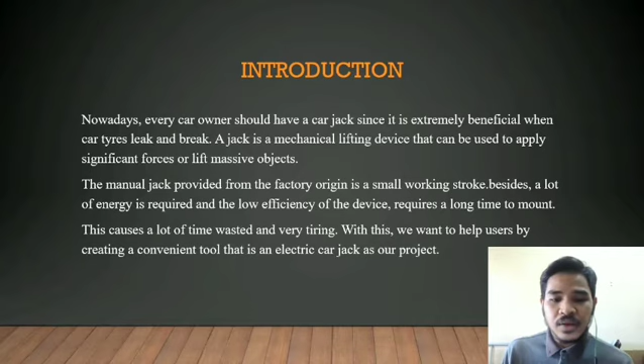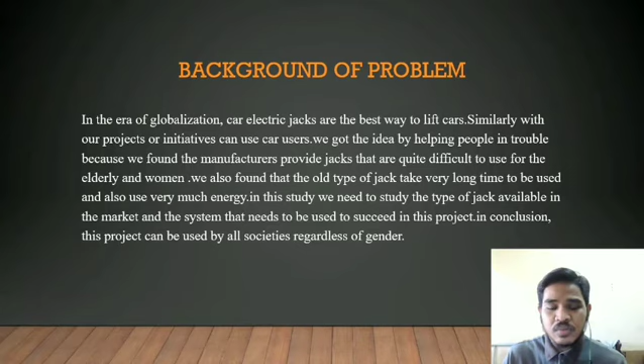Problem statement: first, the normal manual car jack is very tiring to use. Second, the present type jack available right now is hard to be used by women and elderly people. Third, the old type of jack takes very long time to be used and also uses very much energy.

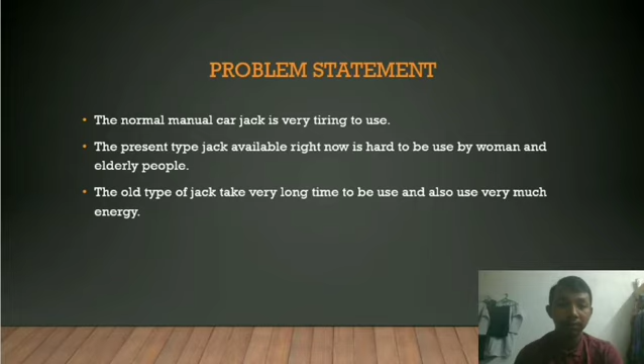Objective: to design an electric machine to make the use of manual car jack easier. Second, to develop a hybrid jack system. Third, to make a jack that can be used by everyone.

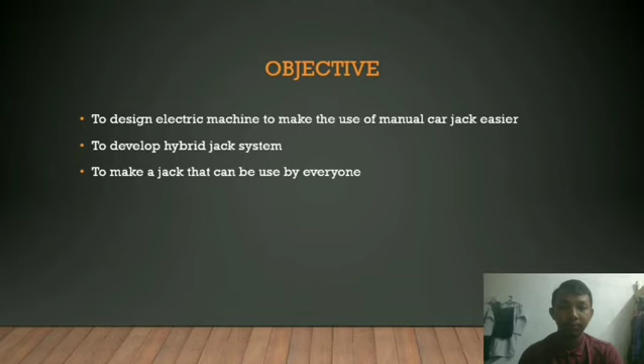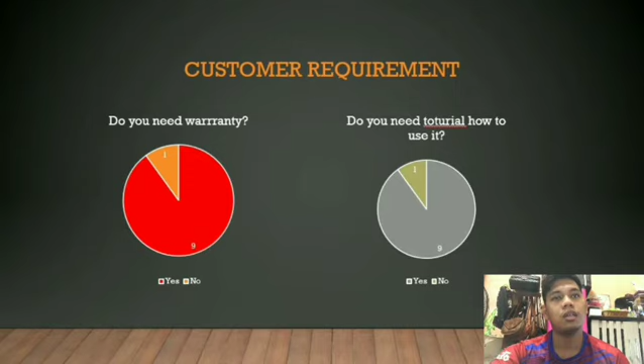And next, do you need warranty and do you need a tutorial on how to use it. Many people need a warranty and a tutorial on how to use the hydraulic jack.

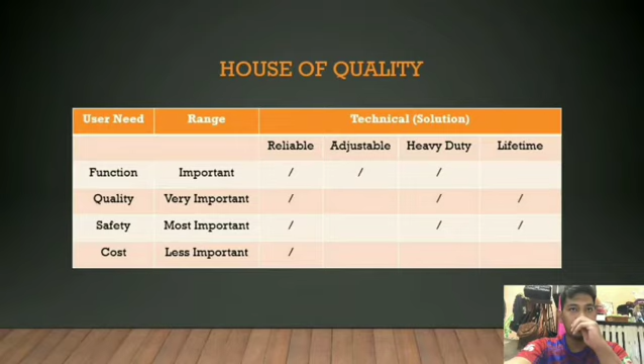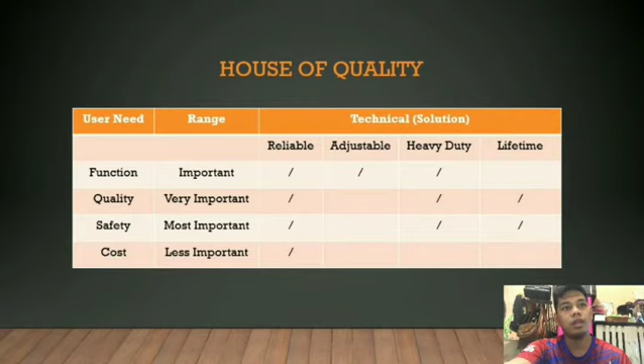Function is reliable and has adjustable, can do adjustable, and can work in heavy duty. Quality is reliable and heavy duty. Safety is reliable, heavy duty and lifetime. Cost is less important and reliable.

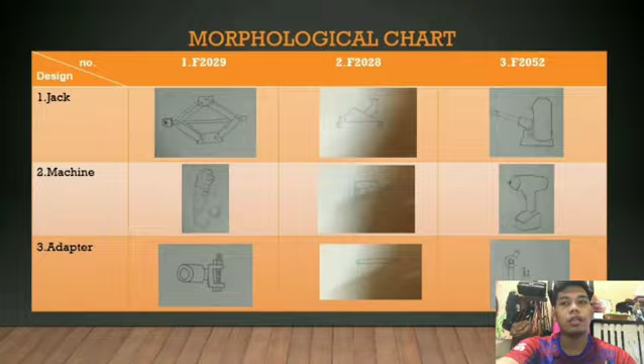On the first picture, it shows the normal type of scissor jack that I would like to use. The middle one is the grinder that has been modified. And the third one is the adapter that fits into the grinder and is assembled into the normal scissor jack.

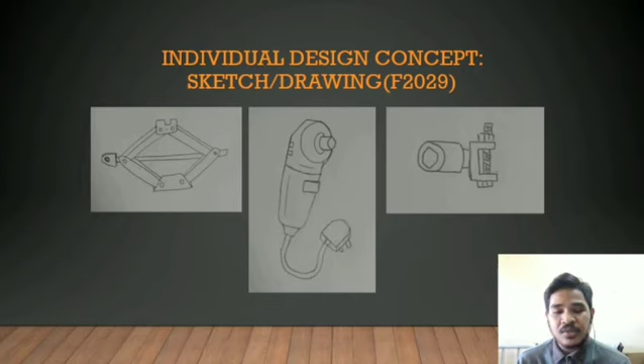Next is individual design concept, product 3. For the portable electric car jack, I use a normal type of scissor jack that supports a maximum of 3 tons.

For the machine, I use a grinder that has been modified, adding a welded hexagon head alloy steel size 17 mm. The bottom is the picture of the bolt. For the adapter, I use a size 17 mm socket that is welded with U-shaped steel.

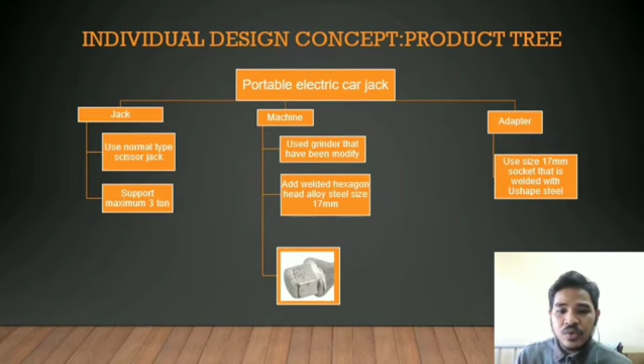For the individual design concept materials, I will use carbon steel. Carbon steel is a steel with carbon content from 0.05 up to 2.1%. According to the American Iron and Steel Institute, no minimum content is specified or required for chromium, cobalt, molybdenum, nickel, niobium, titanium, tungsten, vanadium, zirconium, or any other element added to obtain a desired alloying effect. The specific minimum for copper does not exceed 0.40%, or the maximum content specified for the following elements does not exceed the noted percentage.

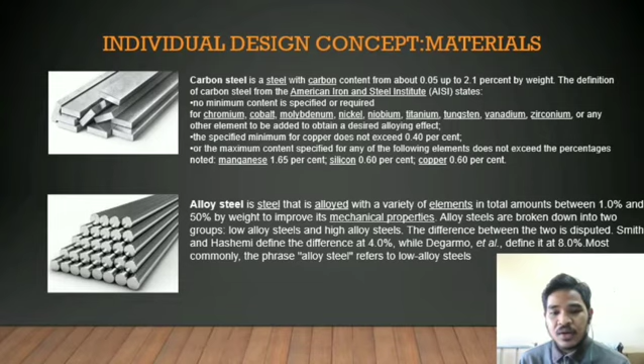The next is alloy steel. Alloy steel is a steel that is alloyed with a variety of elements in total amount between 1% and 50% by weight to improve its mechanical properties. Alloy steels are broken down into two groups: low alloy steel and high alloy steel. The difference between the two is disputed - Smith and Hashemi define the difference at 4.0%, while Degarmo defines it at 8.0%. Most commonly, the phrase alloy steel refers to low alloy steel.

Individual design concept, tools and technology for fabrication. I will use an arc welding machine and rod. It is used to weld a nut head, size 17mm, to the grinder, and to weld carbon steel to make U-shaped carbon steel tools, and to weld the 17mm socket and U-shaped steel.

L-square ruler steel is used to make measurements before cutting the steel. The grinder machine is used for cutting steel for making parts and also used as a project tool. The last is the drill machine, used to make a hole on the U-shape tools piece.

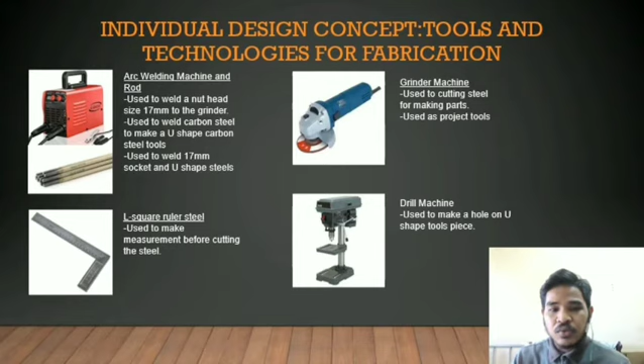Individual design concept, tools and technology for testing, and expected result. The test is the lifting test. We will use the project machine to lift the car up, and the expected result is that the car is lifted up smoothly without any problem.

The next test is hydraulic press. The test with maximum load, which is 3 tons, to the scissor jack. Expected result is the scissor jack is able to withstand the load imposed.

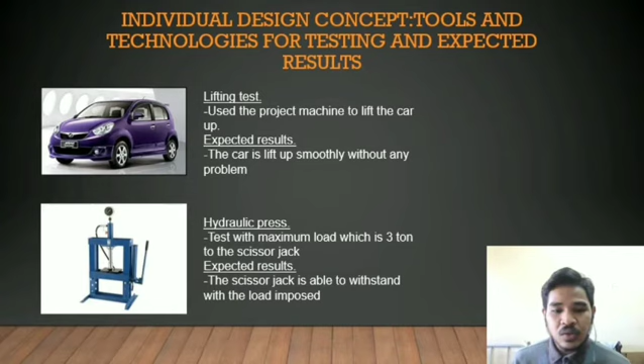Individual design concept, project cost estimation table, for the material scissor jack. Number 1, estimated cost is RM125. Next is the grinder machine, 1 unit, RM25. Carbon steel flat bar, 1 feet, RM4.50 per feet. Alloy steel, 1 feet, RM6 per feet.

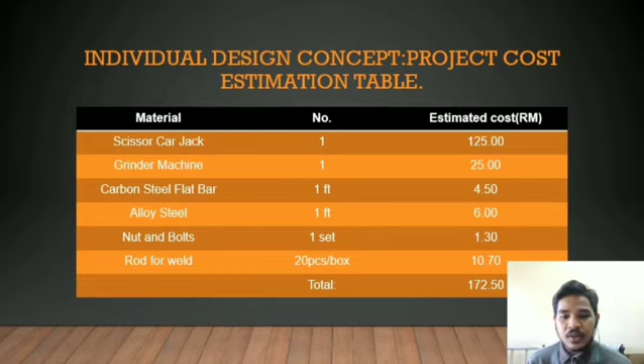Nut and bolt, 1 set, RM1.30. Rod for weld, 20 pieces, comes in a box, RM10.70. The total is RM172.50.

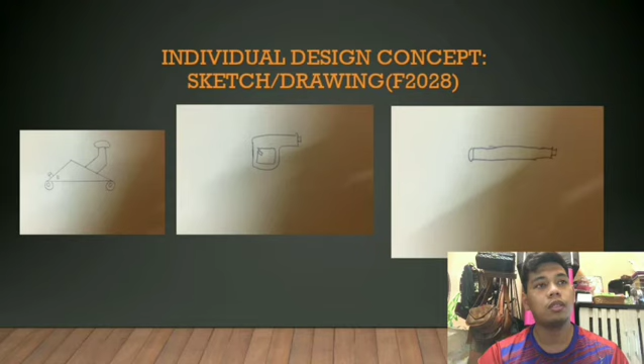Sketch or drawing has 3 types, which is jack, adapter and machine. The next slide is individual design concept.

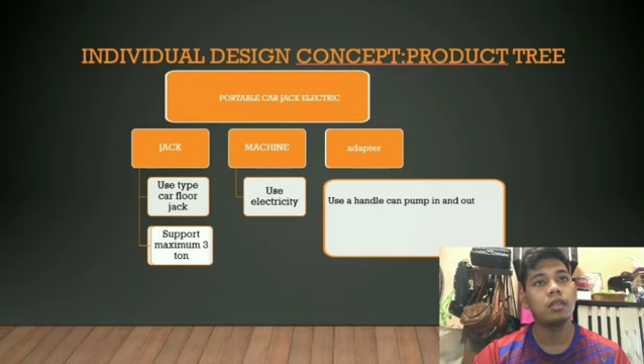Product tree, portable car jack electric. Function of jack is a type car floor jack supporting maximum 3 tons. Function for machine is use electricity. Function for adapter, use a handle that can pump in and out.

The next slide is materials. I use 2 materials, the iron plate and alloy steel. The iron plate is a material that can be made by smelting iron ore in a furnace. When smelt in a furnace for a second time, iron plates will transform into steel plates with a ratio of 5 iron plates per 1 steel plate.

Alloy steel is steel that is alloyed with a variety of elements in total amount between 1.0% and 50% by weight to improve mechanical properties. Alloy steels are broken down into 2 groups, low alloy steels and high alloy steels.

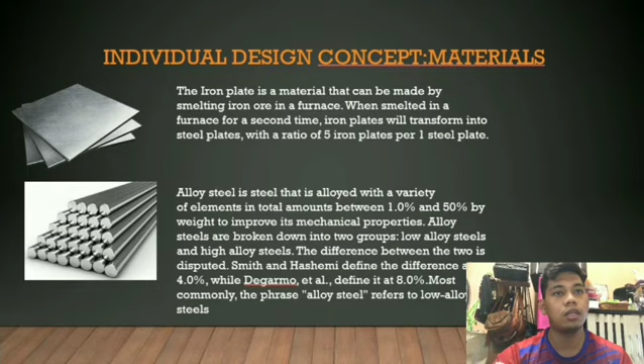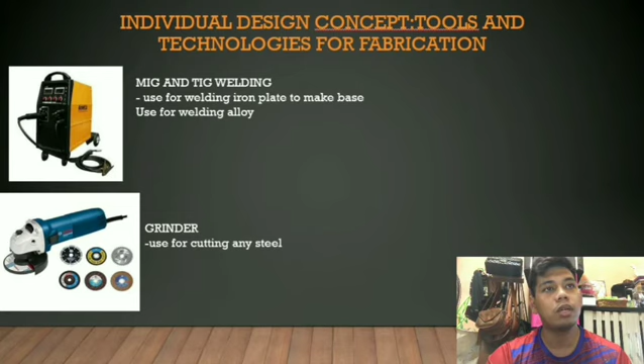Tools and technologies for fabrication. MIG and TIG welding, used for welding iron plate to make the base, and used for welding alloy. Grinder, used for cutting any steels.

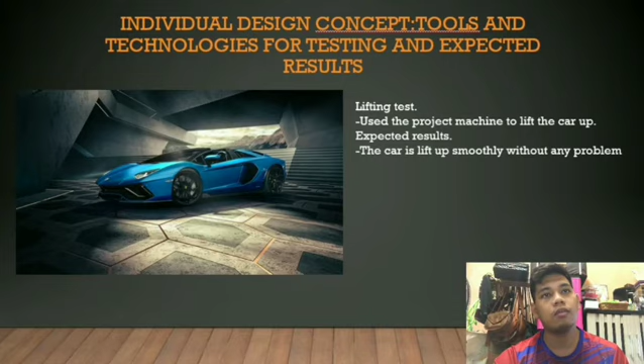Tools and technologies for testing and expected result. Lifting test, use the project machine to lift car up. Expected result, the car is lifted up smoothly without any problem. The last one is the project cost estimation table.

Project cost estimation, I have 2 screws, 2 bolts, 1 floor jack, 1 alloy pipe, 1 grinder and 1 iron plate. For screws, RM6. For 2 bolts, RM3. 1 floor jack is RM100.

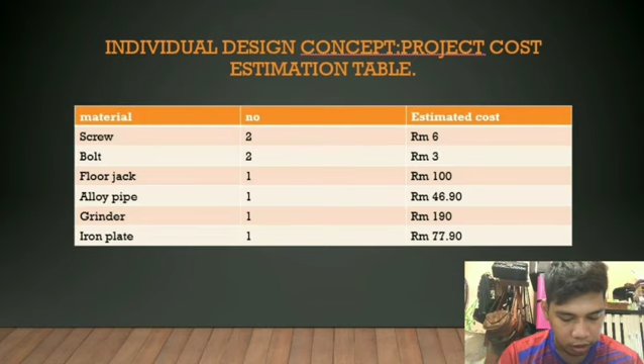1 alloy pipe, RM46.90, and grinder RM190. Iron plate, RM77.90, and total estimated cost is RM423.80.

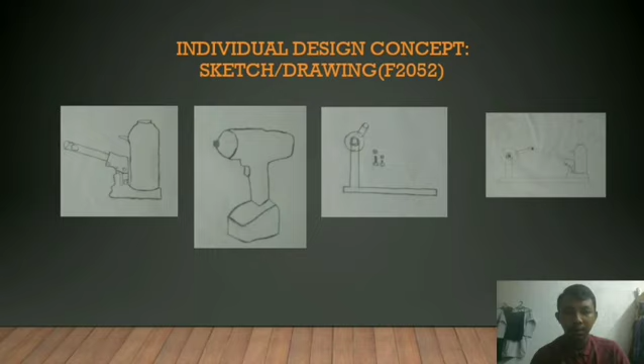Individual design concept F2052. The first picture is a bottle jack. The second is an impact gun. The third is a crated adapter.

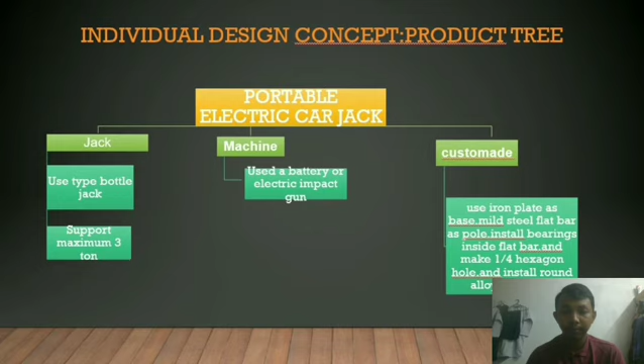Material: the iron plate is a material that can be made by smelting iron ore in a furnace. When smelt in a furnace for a second time, iron plate will transform into steel plate with a ratio of 5 iron plate per 1 steel plate.

Mild steel is a ferrous metal made from iron and carbon. It is a low price material with properties suitable for most general engineering applications. Low carbon mild steel has good magnetic property due to its high iron content. It is therefore defined as being ferromagnetic.

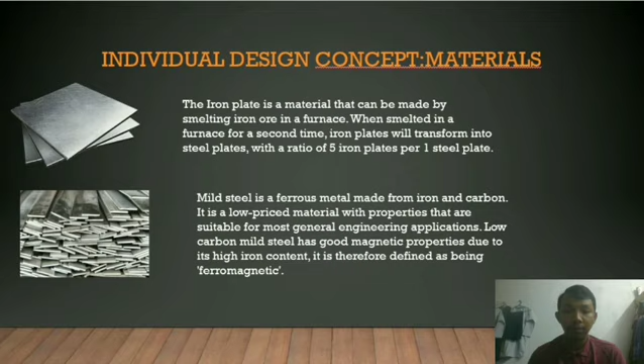Alloy, a metallic substance composed of two or more elements as either a compound or a solution. The components of alloy are ordinarily themselves metals, though carbon, a non-metal that is an essential constituent of steel. Alloys are usually produced by melting the mixture ingredients.

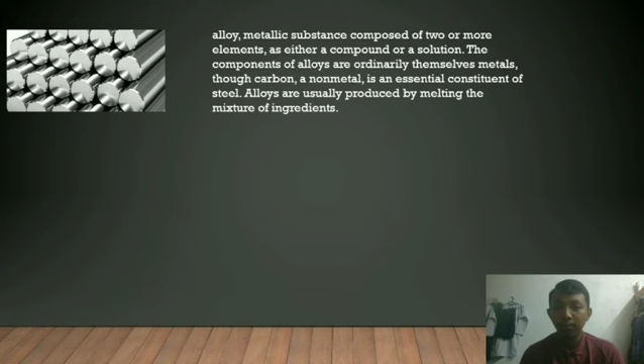Tool and technology for fabrication. MIG and TIG welding, used for welding iron plate to make a base, used for welding a flat bar and alloy. Grinder, used for cutting any steel.